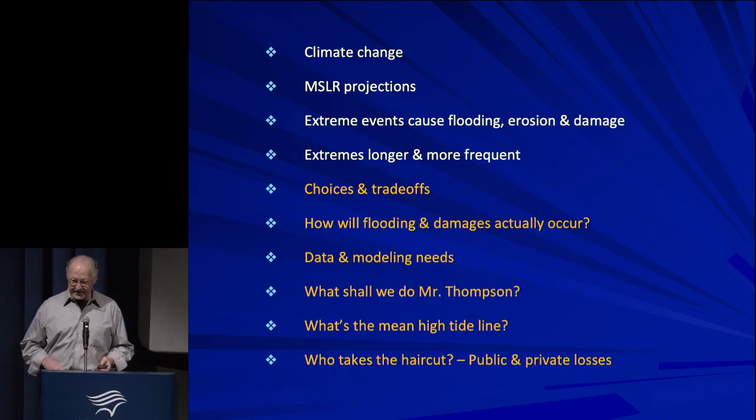Of course, Jerry's been around since the last ice age, and he'll probably be here till the next one. But most of us baby boomers are going to be gone.

And this is the really sad part. I've worked on sea level for over 30 years, and I'm not going to live to see the worst of it toward the end of the century, and that really makes me sad. Anyway, if you're engaged in this the way I am, the worst of it is not going to happen unless something unusual and very frightening happens very quickly in West Antarctica. The worst of this is not going to manifest until mid to late century. So we'll talk a little bit about the probabilities about all of that.

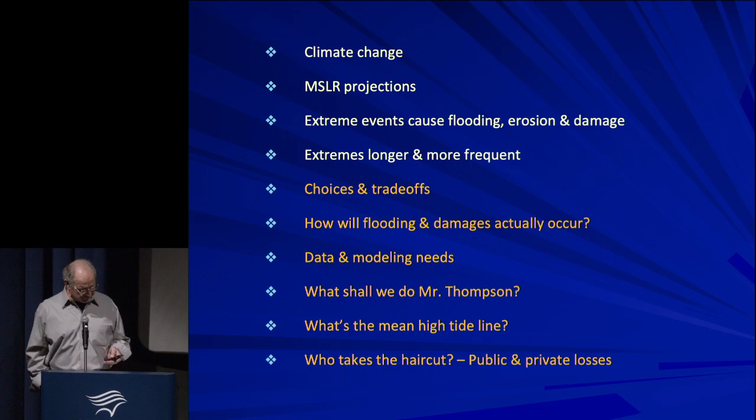By the late 1800s, a guy named Svante Arrhenius, a Nobel Prize-winning chemist, and actually the grandfather of a chemist that worked at Scripps Institution of Oceanography, where I am, talked about the quantitative amount of warming. So 8 degrees, he guessed, if 2 or 3 times the CO2 at the time when CO2 in the atmosphere was 295 parts per million.

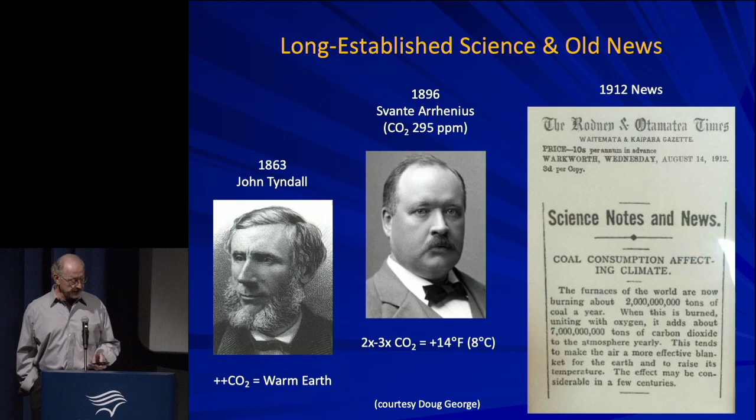So there's a really cool quote from Neil deGrasse Tyson, "Science is true whether you believe it or not." So the bottom line here is, please believe the science. Let's at least start with common facts and common knowledge. All right. So a little bit of perspective here. Walter especially, and most other people get nervous when I start talking about geology, but I will anyway.

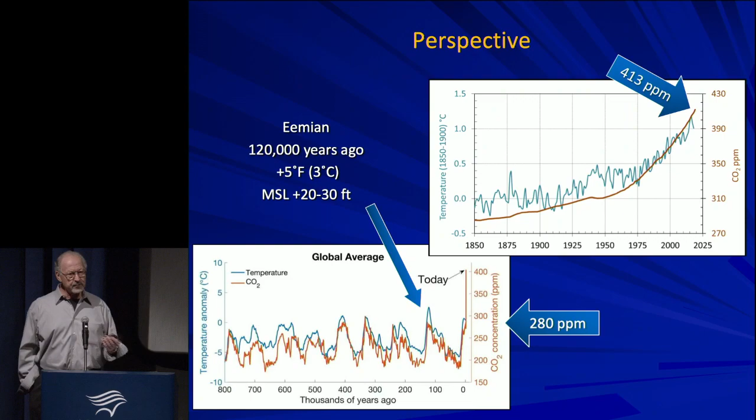The Paris Accords, that we pulled out of recently, they wouldn't work anyway. But if they had, they would try to limit emissions and limit the temperature rise over the next century to 2 degrees centigrade. We are already at 1 degree, so if you look at the upper graph there on the right, you can see from pre-industrial times, we are about 1 degree centigrade warmer, and CO2 concentrations are well on the way to doubling. So we're at 413 parts per million now, well on the way to 560 parts per million, and that's almost unstoppable from what you'll see in a few slides.

So I have these little keynote things that I'll summarize at the end in a couple hours.

We should cut carbon emissions. We should. This is the mitigation part. We should mitigate to try to limit the amount of greenhouse gas emissions and limit the ultimate warming that will occur over the next couple of centuries to where we don't end up with a Venus effect, you know, where it's 700 degrees and the carbon dioxide concentration is 90% in the atmosphere instead of 0.04%.

Okay. So now sea level rise is sharpening and making more acute and challenging the challenges and the trade-offs that we have faced in the California coast and most other coasts, of course, but specific to California, that we faced all along ever since development started in California 150 years ago.

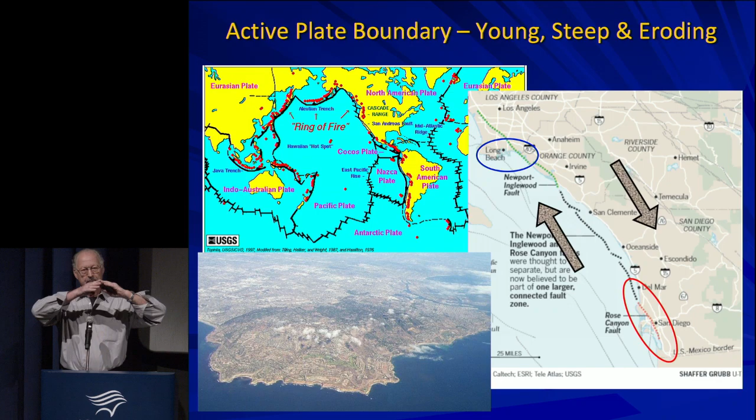And so what happens when you have this northward motion relative to the North America plate, is that pieces of this fault bump together and other pieces separate. When they bump together, something's got to go up, okay? And when they separate, something's going to go down. And so what we see is this alternating, and it extends all the way up the California coast, at least to San Francisco, are these features of alternating highs and lows, river valleys, lagoons, and then headlands.

And so I've got this shot of Palos Verdes there looking south, Long Beach in the right corner there. And so most of our coastline is actually relatively immune, or at least less threatened by sea level rise than many other coasts, right? Think of the Gulf Coast, the East Coast, for example, are much more low-lying, much more subject to severe weather, hurricanes, and all of these things that we don't have. And the reason for that is the tectonics.

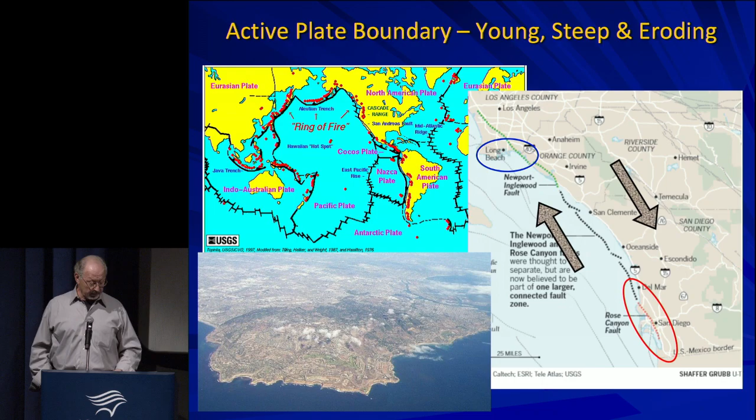So when people tell you that, you know, I had a vacation in California, it was very uplifting, that's actually literally true. Okay, now where are we? I'm getting old, so I have to remind myself where we are.

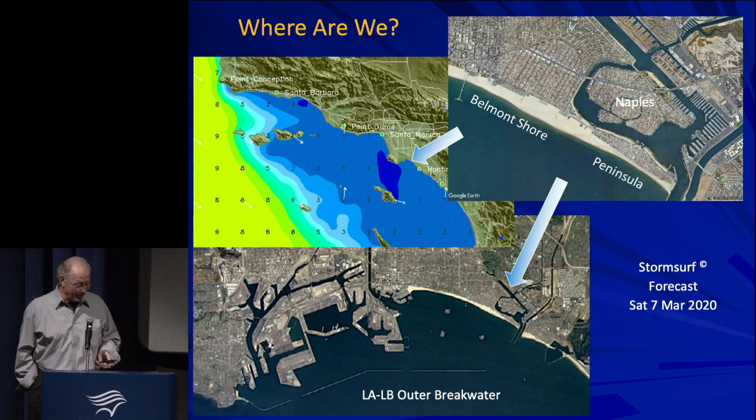We are in Long Beach, and you'll see on the upper right, we're focusing our attention today on Belmont Shore, the Long Beach Peninsula, and Naples, the low-lying, most vulnerable areas that Jerry hinted at. And one of the key features here that makes Belmont Shore and Peninsula and Long Beach in general different than almost all of the rest of the open coast of California is this nice little feature you have here, courtesy of the Corps of Engineers.

Okay, I was promised I could go backwards.

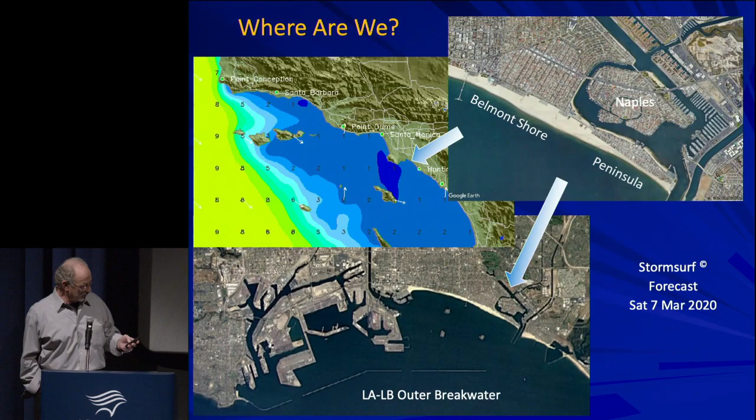There we go. Okay, and that's the LA Long Beach outer breakwater, with its two entrances for shipping. And that's been there, what, since the 40s, maybe 30s? When was it built? 40s. And what it does, in effect, is shelter most of Long Beach except for parts of the tip of the peninsula from the waves from the North Pacific Ocean. And that's a big deal.

So here's a thing you can get on the web on the left there. This is a Stormsurf website, Stormsurf forecast for Saturday. And what you see is interesting. The offshore wave heights are 8 or 9 feet out here in the yellow. But the wave heights inside at Long Beach, just south of the Palos Verdes and toward the harbor area there, are a foot or even less.

And so there's a high sheltering, partly would be anyway just because of Palos Verdes Peninsula, but for almost all directions except from the south, this area is highly sheltered from waves. And that makes it unusual and much more manageable than most of the rest of the open coast of California.

Now there is this window, and it became clear from Hurricane Sergio back in 2018. This is a coastal data information program, a Scripps program funded by the state and the Corps of Engineers, and it shows the Northwest Pacific swell coming in here, and then even higher, you'll see the wave heights over here, what is it, 4.5 feet or so, coming from almost due south, 170 degrees.

Is that better when I talk louder? I can't, I'm too tall.

All right. And that created havoc at least at the southern tip of the peninsula. You'll know better than I do because you were here, many of you, of the problems and the flooding that caused. So there is an opening to the south where the peninsula and Belmont Shore and, of course, Seal Beach and the rest of it are more vulnerable.

And so as the Pacific warms, as more hurricane activity is fueled off the coast of Mexico, and as these things come farther north, this could become an increasing problem in the future. Now, in 1939, before anybody was really talking about sea level rise or warming in a serious way, there was a hurricane that did make landfall in Long Beach, killed a bunch of people, and did a bunch of property damage. So this is not impossible. It's not out of the question that we'll have southern exposure here that's serious.

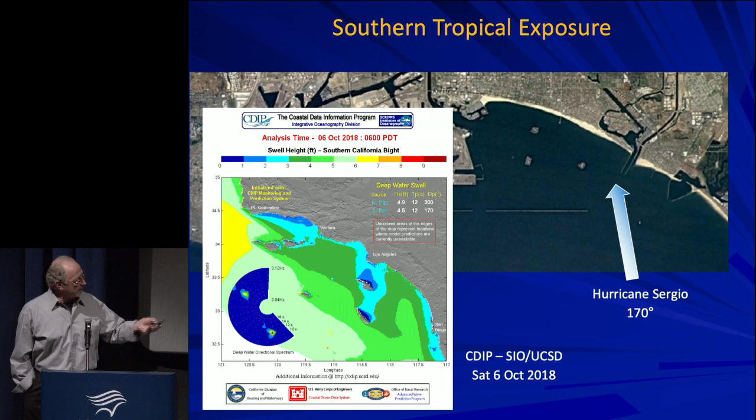So not having much more detailed wave information inside, just out in front of Long Beach, inside the breakwater, is a little disappointing and a little bit surprising. So that's something I would suggest get done.

Okay, now, what kind of future do we want? Well, I love quotes. You'll see that in the next few slides also. So this was Greta Thunberg, from Sweden. I want you to panic. I want you to act as if the house is on fire, because it is. And she's talking about the warming in general.

So the reason I frame it this way on the right is because of the latest guidance, I put guidance in quotes, from the California Coastal Commission and the Ocean Protection Council. And guidance in this sense means you damn well better take this into account if you want a permit. That's what guidance means in state jargon. There are 2 possible futures considered in what I'll talk about shortly.

There's a high emissions, and those of you that follow the IPCC, it's the so-called 8.5 radiative, what's it called, representative concentration pathway or something. Anyway, it's the number of watts per square meter excess radiation that will occur by 2100 if we go in the high emission scenario.

So it'll be 8.5 watts per square meter global average of excess radiation to warm us, keep us toasty. And that's the trajectory we're on now. So you see now is 2020. And then there's a low emissions scenario, so they just break it up into 2 rather than the more complex 4 or 5 more in between.

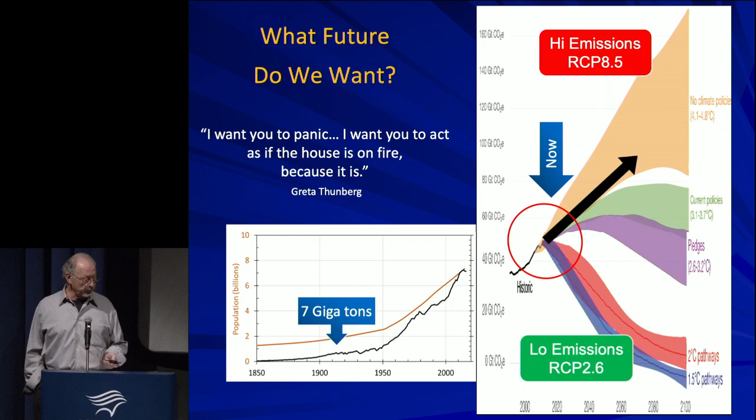So the question is, what future do we want? And that's really the largest uncertainty. We're going to have some discussion about uncertainty. The biggest uncertainty is what humans are going to do about emissions. That's the biggest uncertainty. It's not the science as such.

Now, if we have a doubling of CO2, we don't know exactly if that's going to be 2 degrees or 2.5 or 3. That's true. So the science is uncertain in that regard. But the biggest uncertainty of all is nobody knows what humans will do in the next decades or century to limit the effects.

All right, so this is Jim Hansen 32 years ago, one of the leading climate scientists in the world. Ironically, he started his scientific career studying Venus. And this got him interested in CO2. And he was one of the early ones who said, look, if we keep this up, we're going to have a runaway Venus effect on Earth. And instead of an average temperature of 60 degrees, it'll be 600. That's far-fetched. That's not likely in the next few hundred years or even few thousand. But that's probably how Venus got started as well.

Anyway, we need a steadily increasing carbon fee. So that was his method, and still may be the most economically rational way to do it. Just price carbon to pay all the externalities, and then let the markets sort out what's the most efficient way to cut carbon use.

And then you have the second. So this is mitigate, adapt, retreat, right? The 3 approaches. So you reduce the amount of carbon, and then you have the Winston Churchill approach. We'll fight on the beaches and we shall never surrender. So that's the adapt approach, which we're bound to do a lot of because mitigation just isn't moving forward fast enough.

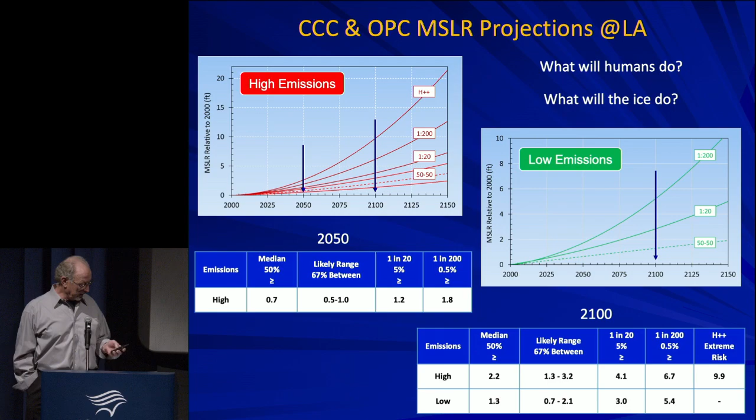Only 20 feet. Who has a two-story house on the peninsula? That's about 20 feet, right? If all of Antarctica melts, which nobody expects, that's like 270 feet of sea level rise globally, including here. So just to put that into perspective, nobody expects that to happen. I just say that to get your attention.

So that high scenario graph is repeated here, with the 2000 to 2050 graph inset, along with the measurements of sea level. Those are the annual mean sea level measured at the LA tide gauge, which is down there close to Palos Verdes.

It's in Cabrillo. What's the San Pedro. That's what I was trying to think of.

It's near San Pedro, so it may be in an uplifting situation from Palos Verdes, because the sea level rise at LA over the long term, over the last 100 years, is lower than in most of Southern California. So you have a little bit of an advantage, but that might just be because the gauge is in a funny place. This is a study we've got to do to figure out if this is representative of this southern part of the bay near Long Beach. But anyway, there's the projections and the inset.

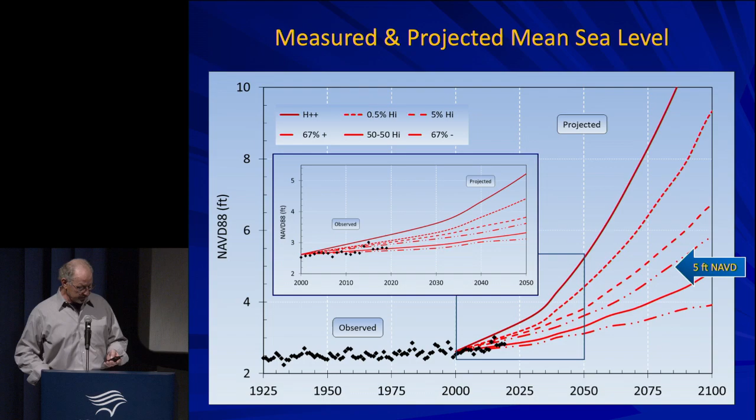We can talk about this later if we need to. So mean sea level doesn't actually flood anything, though, right? It's when you have high tides and El Niños and big storms and storm surges and big waves. That's what actually floods things.

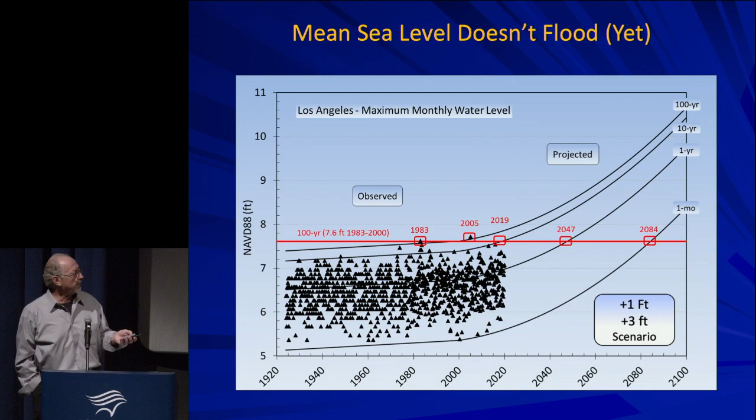So just remember 8 feet, I said keep that in mind. There's a cross-section at 64th Place, not shown on the map here. 64th Place is down here, about halfway down the peninsula. This is the berm built up seasonally on the peninsula to protect from wave attack and storm surge. You'll see the peninsula on the ocean side is 10 or 11 feet, but on the bay side, you quickly get down below 8 feet. So 8 feet NAVD for the peninsula, for Alamitos Bay, is a crucial elevation to keep in mind.

And the maximum water levels already observed, without even the next 50 or 100 years of sea level rise, are already very close to that elevation.

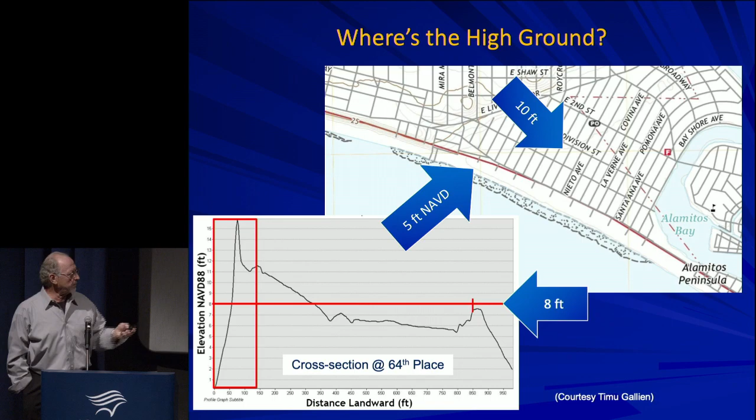Now, I showed this picture. It's the same picture, same monthly maxima, but I covered over the dates here, because as Alyssa said, we don't know when these elevations are going to occur. There's a huge range of uncertainty, as we saw in the graphs and explained, and anybody that tells you we know what sea level is going to do, except probably go up, almost certainly go up in the future, how much is just unknown at this point for the reasons I said.

The point is I think it's more useful in many ways to think not so much about when, but how much. So mean higher high water, the average of the high waters, is down here at 5-something feet, 5.3 feet. I love how NOAA puts these. HAT is the highest astronomical tide at LA, about 7.1, a little over 7.1 feet. Right, so that's over here. The highest observed water level, HOWL, is the 7.7 that I pointed out earlier. It was during the El Niño of 2005.

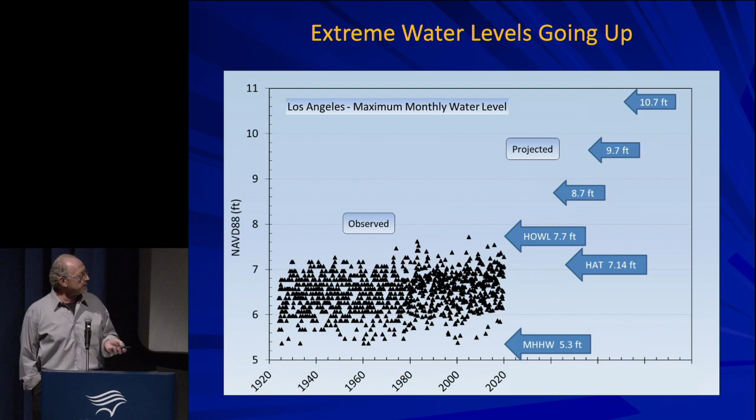Now think about what this means if you have 1 foot or 2 feet or 3 feet more of sea level to your particular situation. That's what we're trying to get at today in this meeting, and I'm sure Jerry has future meetings to the next ice age planned out ahead, okay. All right, just to get you ready.

Now, Jerry hinted at this. How will losses actually manifest and unfold? I am pretty certain, as a coastal oceanographer, Walter and I had a job in Biloxi. I visited this area, Gulfport in Biloxi. I actually saw this sign, the Waffle House sign. If it wasn't so tragic and loss of life and property, it would have been funny. Just having the sign and a slab, where the Waffle House was, I don't know if you've been to a Waffle House, but they have really nice breakfasts there, or they had.

On the coast of California, the future is not going to manifest this way, almost certainly. And Katrina, there were some Hurricane Sandy pictures there on the left.

First of all, we don't have 80, 100 mile an hour, 140 mile an hour winds. We don't have, we really, literally, physically cannot have 23-foot, 28-foot storm surges like they had in Biloxi that essentially wiped out entire neighborhoods. There was flooding, but it was this massive destruction of entire towns, coastal towns stripped away. I drove inland, a mile or a mile and a half inland. There was a huge fishing boat about 100 feet long sitting in somebody's front yard, by this time, a few months later, high and dry. That just can't happen on our coast.

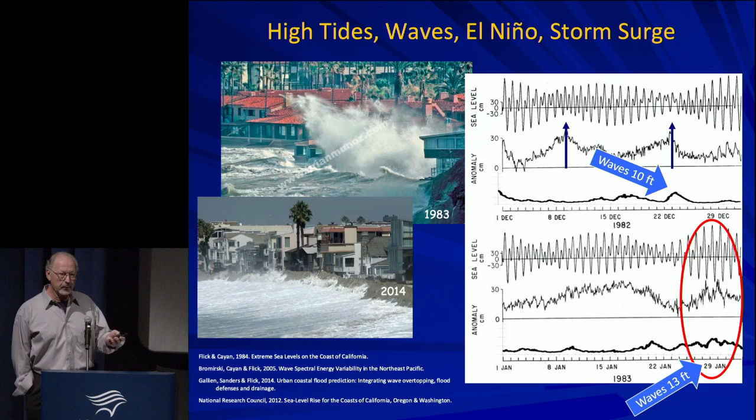In the 2015-16 El Niño, we had a near miss, again, because the tides were not in the right phase. Otherwise, the destruction would have been a lot worse. So you can predict the tides.

These are the maximum monthly tides predicted for the next 50 years, out to 2050, 30 years now, and you'll see these patterns in here. So there's these 4.4-year patterns, higher, then in between. And if your eye is careful, you'll see this 18.6 year pattern, and this has to do with the astronomy, lunar motions, the astronomy of the moon.

2014-15, which was all hyped with king tides and the El Niño and all that stuff, those were actually the lowest tides in 2.5 years. See, 2.5 years earlier, 2 years later, those tides were quite a bit higher. And half a foot makes a difference. It doesn't sound like much, but it does. A half a foot can make a difference between flooding over a seawall or not.

And the coincidence of the day, the time of day of the high tide and the approaching waves and the storm surge and all that makes a huge difference. So this is very important.

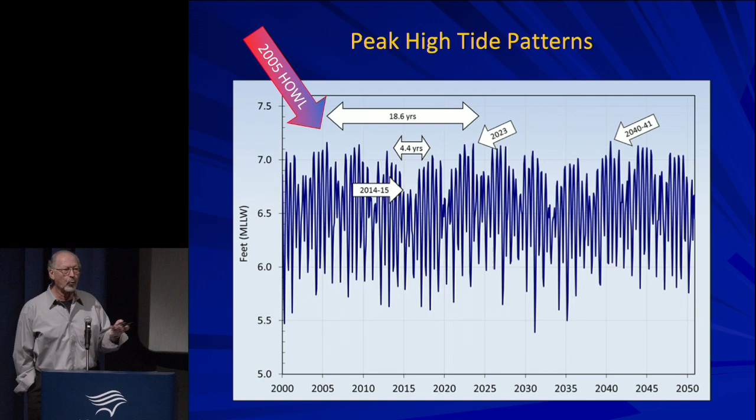And there's your 2005 highest. There's the HOWL. So the highest observed water level occurred during one of these 4.4 year peak cycles, which is not surprising. So now you can almost circle, over the next few decades, the years where you're most likely to have floods. Not certain, but most likely, or more likely, just because of the tide patterns.

Okay, so Walter and I have done this for... where was it? Up here in Northern California, San Luis Obispo, for what was the name of that place? Yeah, for Unocal, but the location, what was it? Avalon. No, not Avalon, Avila Beach.

So we would look at the forecasts, we would look at the tides, we would look at the wave forecasts, and we would make some pronouncements. I would get my briefcase, I'd be from out of town, and we would meet, and send out flood warnings: okay, next week we have high tides, storm waves, so-and-so, and the model shows that you're vulnerable at Avila Beach for those reasons. That could be started anywhere along the coast. A lot of that information is available, and that's a recommendation.

Okay, so Alamitos Bay, what was I going to say here? Oh yeah, so this is how it actually will, in my opinion at least, manifest, how the future mean sea level rise will manifest. And it'll be flooding, mostly flooding, especially here where you're largely protected, not totally, but largely protected from waves. And so the progression will be, there may be other, more nuanced steps in here, but from nuisance, which it is already occasionally, to dangerous and to catastrophic.

And I think the big question, one of the big questions that we have to address and want to address perhaps today, is to start the conversation about what happens after the catastrophic flood, what happens the day after. Your house gets flooded, or the aquarium gets flooded, or some public facility.

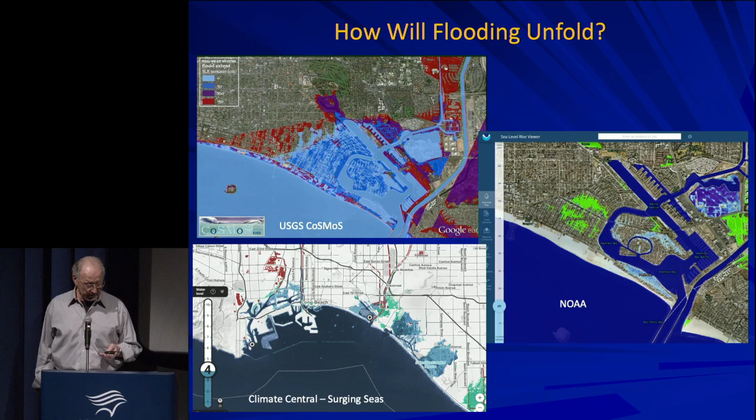We look at these models. There's the USGS CoSMoS model, Climate Central has a model, everybody and their brother-in-law, including NOAA, has a flood model. Most of these flood models overestimate the flooding. So first of all, you should be looking at models, or developing models, that actually work for current conditions, so you can make a better estimate of what future conditions with sea level rise will actually be.

So this is a thesis result from University of California, Irvine, from Timu Gallien, who developed a flood model for Newport. And for identical water levels, 7.3 feet NAVD, this was I think the NOAA flood model, or one of those models. There's Balboa Island, completely underwater. And here are her measurements and her model. And you can see that the flooding is much less severe.

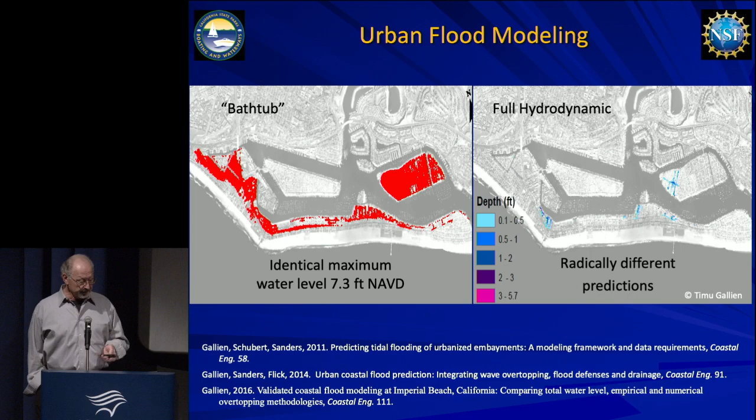First of all, the high tide only lasts a few hours. Many of these places aren't connected, right? Even though the elevation might be below 7.3, there's no way for water to get there. So all of those affect drainage, seawalls, just 100 small things actually matter a lot. So this is something that really needs to be done properly for Long Beach. So that's another recommendation, and I'm getting close.

So who shares the losses? I have a few things. This is more of an editorial comment. These are my own private opinions. Public and private losses, well, that's not an opinion, that will happen. Public and private losses will occur. This is my personal opinion, for those of you listening that have power over my day job.

I think there's a public responsibility and an interest in private property. First of all, none of these houses were built illegally. Right? You all have permits for your house and your development. Secondly, you've been paying property taxes. Some of you have probably been paying pretty hefty property taxes on your coastal property. So there's a public benefit and a public responsibility.

Now, a lot of people say, well, these people shouldn't have built this stuff there in the first place. You should have known better than to build a house in a low-lying area. Well, but some public agency gave you a permit to do that. Maybe the Coastal Commission even did, and your city or your county. So there's some public responsibility here, for sure, and there's certainly financial interest because of the taxes.

There's also, I think, a public interest because when the day comes when you can't rebuild your house, that location will probably return to the public. So there's some public interest there for the long-term future. So I think that all comes down to the legal and the financial alternatives. And that discussion should start now for what will certainly happen over the next decades and centuries.

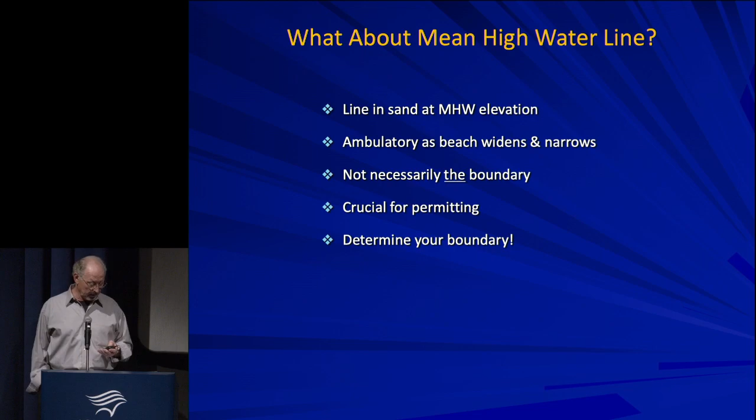Boundaries can be fixed and not ambulatory for various reasons that are complicated. I'm not a lawyer. You should find a lawyer that can talk about that, and then a competent surveyor to tell you where your actual boundary is. And that's really all I can say about that.

So this summarizes, this is another one of my favorite quotes. What shall we do, Mr. Thompson? What shall we do? Just a couple of minutes before they blew Dr. Narcisse's head off in Boardwalk Empire. Great show, recommended. We went through all of this. I've used it more in my time than I should. We're going to need a bigger boat, so thank you.

Thank you, Ron. So I went way over my time. That's all right.

So my takeaways, a few of them. Flooding will go from nuisance flooding to dangerous to catastrophic. The problem is we don't know when that's going to occur. I think it's unlikely that it will occur, though, before 2050. But as you say, it will happen. And it's surprising how little we're doing to get ready, because the longer we delay, the less time we have

to adapt. We need to have a wave study. We should develop the kind of model that Timu Gallian has done. She has spoken here about that. And my hope is that we can raise the level of awareness in this city so that we can begin to plan appropriately to deal with this issue.

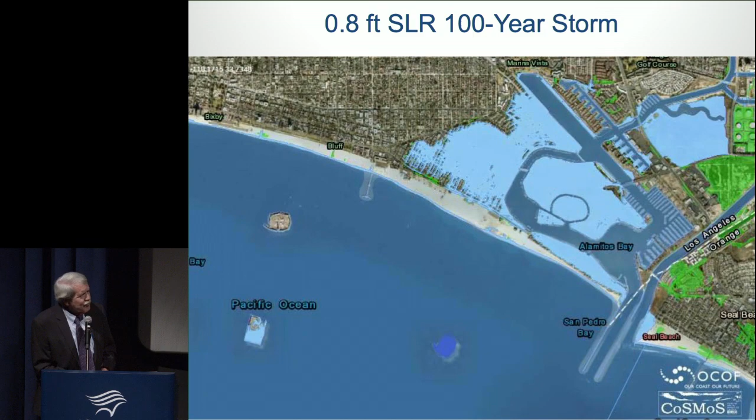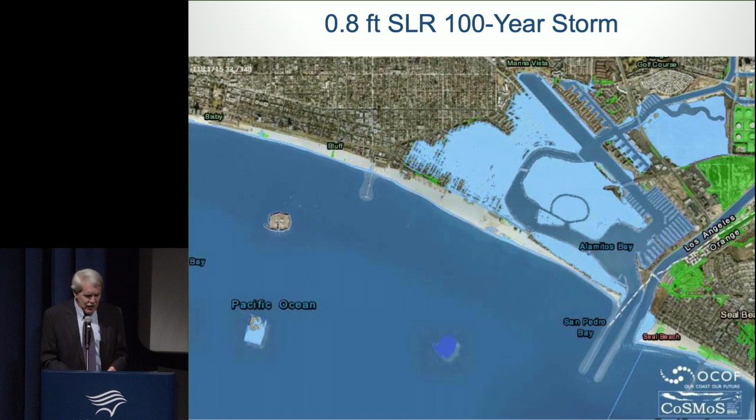If you switch to just 0.8 feet of sea level rise, and Ron showed this photo as well, this covers a very large area, flooding most of, we'll say, both Naples, the Peninsula, and this entire area. The important thing is that this creates a severe problem. Ron talked about when you might expect this.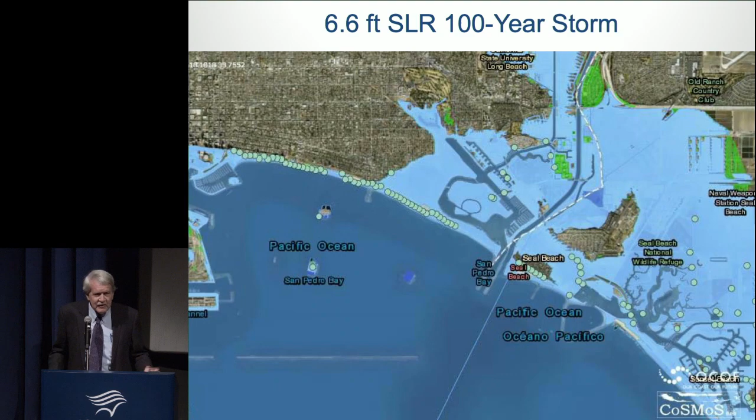At this point, you might be asking yourself, why do we have all of these problems? Well, as it turns out, this whole area has been built within the floodplain of the San Gabriel River. All of that green margin was the low-lying floodplains of the San Gabriel River, in which we've all urbanized and built the development, albeit at a relatively low elevation, but your urban environment has been built in the San Gabriel floodplain.

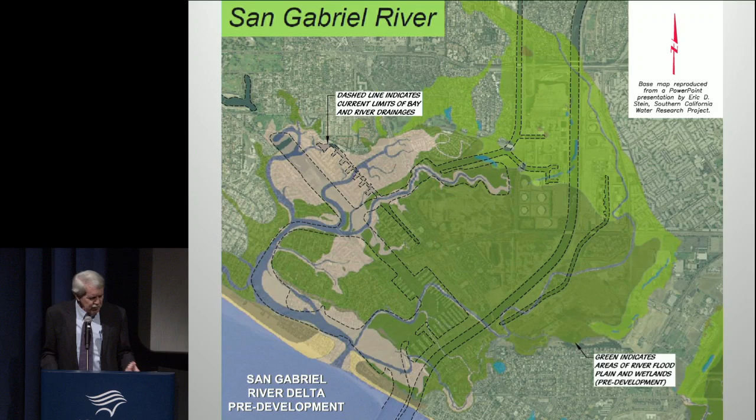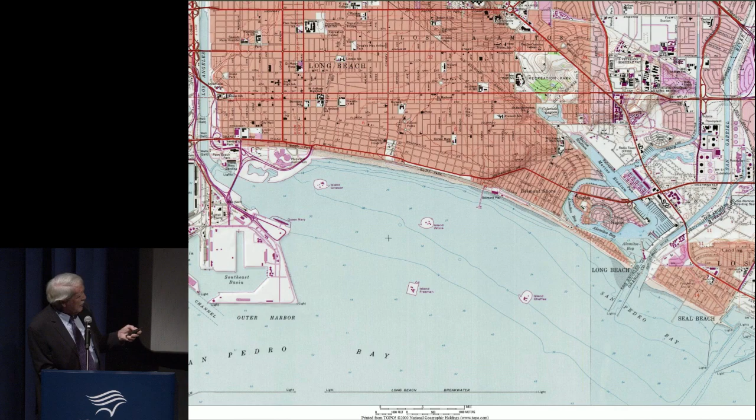Now, this is a USGS map showing your area, and again, the important thing is you can see, I can hardly see from here, but even the topo maps show, am I pointing at the right location? Shows an erosion hotspot at the east end of the Long Beach breakwater. And this breakwater is super important for the city of Long Beach. You are so much better off than most coastal cities where you have the full brunt of coastal storms. The Long Beach breakwater provides significant protection for the majority of Long Beach.

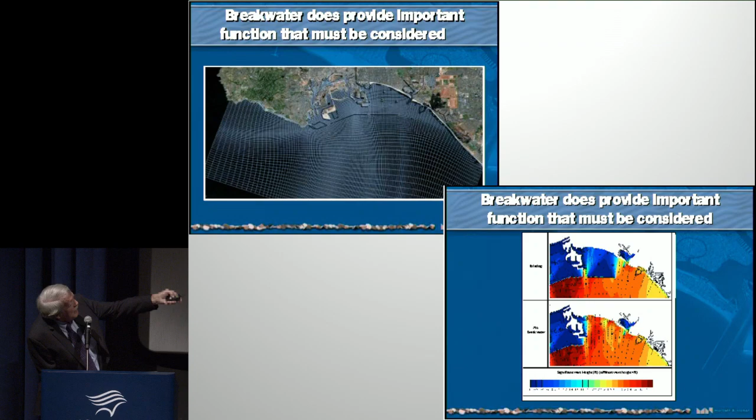Now, this is a photograph, both the study area and some wave modeling done by Moffatt and Nichol in response to a study requested by a very small but vocal group of folks that want to see at least a partial, if not total removal of the Long Beach breakwater, because they want to bring surfing back to Long Beach. As you can see over here, the consequences of removing even half of the breakwater will have a devastating effect on the city of Long Beach, your coastal area.

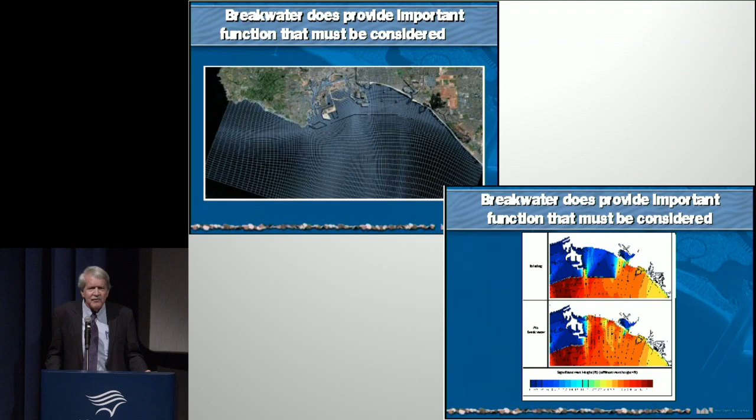And what I would request, the one thing, if you take one thing away from this entire lecture series today, don't ever, ever let anyone talk the city of Long Beach into removing this breakwater. You don't realize the value it provides. Keep in mind, 95% of world commerce is transported by ships. You have a very good harbor here where ships come in and anchor in anticipation of getting into both the Port of LA and Port of Long Beach, and it provides a safe harbor for the ships, but it provides significant protection for the city of Long Beach.

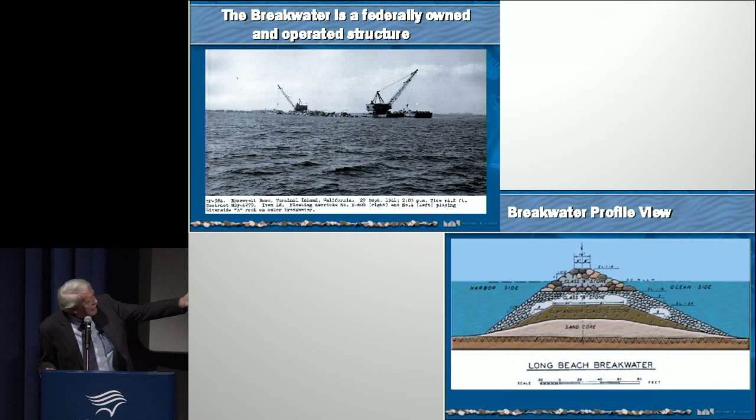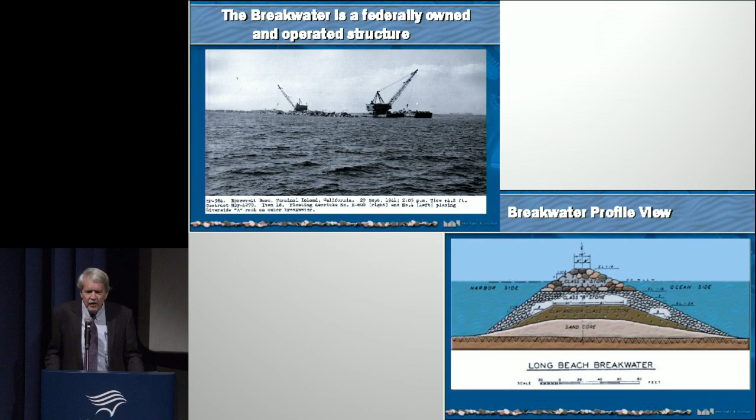Again, this shows the breakwater under construction in 1941, shows the actual design section of the breakwater. The top of the breakwater is about elevation 20. And actually, one of the things that you can do, unlike virtually every other coastal city, if you extended your breakwater easterly 1,500 to 2,000 feet, not only would you provide a little bit more safe harbor for ships, you would completely protect the city of Long Beach from offshore storms. Just something to think about.

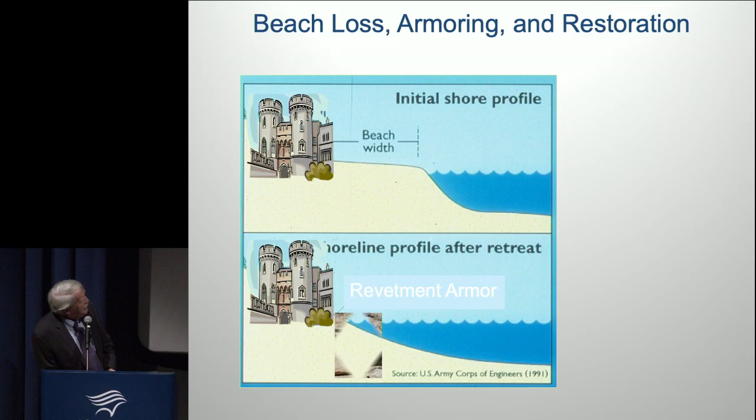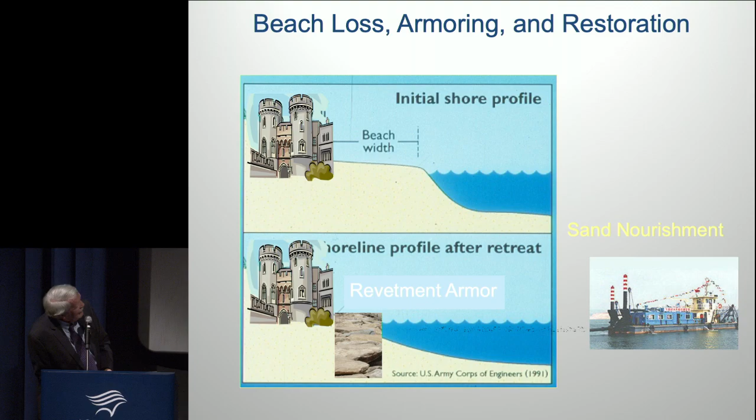What we do as a first line of defense is, as engineers, whether you build a seawall or a rock revetment to stabilize, but what we found is the Coastal Commission doesn't like rock revetments. What they do like is beach nourishment, and the beach nourishment then provides protection for the rock revetment.

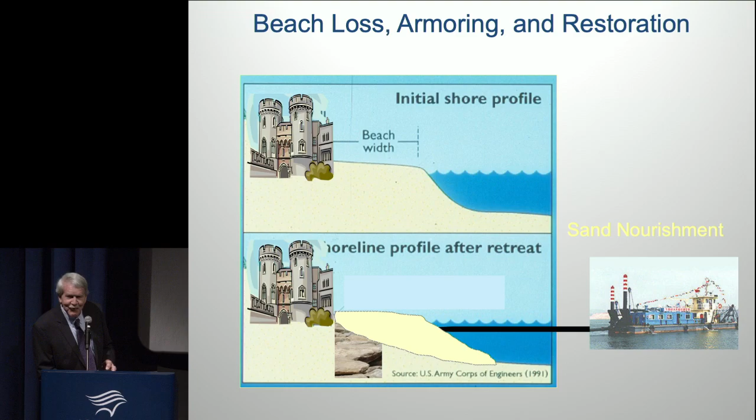And Ron gets credit for this slide. This is Ron's slides, but I thank you, Ron. He wants credit for that.

So this is a slide actually in New Jersey, but the thing is, beach nourishment is something that while you guys move sand very economically, you need to occasionally do beach nourishment. This is Great Lakes Dredging, one of the largest dredging companies around. They did the San Diego County dredging projects in 2001, 2012. This is off of Townsend Inlet, but it's really economic, putting aside the mobilization cost of about $5 million, a lot of money.

Because you're within the outer harbor, it's very easy to dredge an abundant amount of sand to put it on the beach. And you could pretty economically put sand on your beach when one of their large dredges is on the west coast to provide additional stabilization.

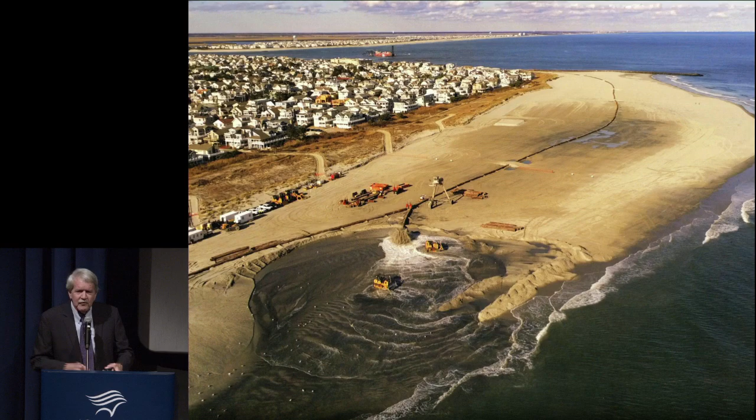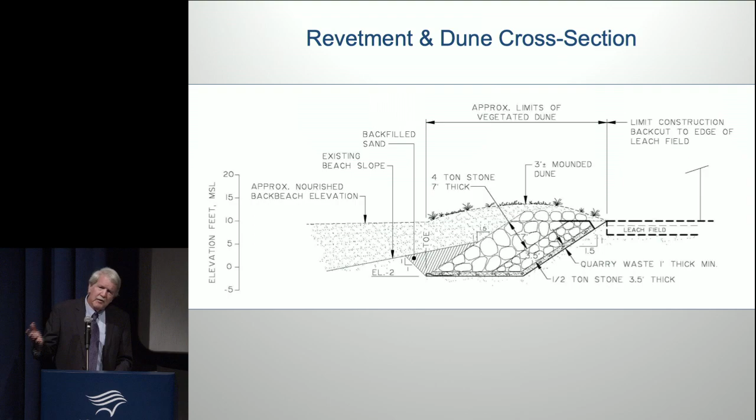This is a photograph at Broad Beach where they have dunes, and this is where we've done a fair amount of work, but what we've done is we've recommended a rock revetment to stabilize and protect the property with a stabilized dune, and the stabilized dune provides an attractive environment that the Coastal Commission approves of. So this is still a permittable project, and every time a big storm comes and erodes away the dune and exposes the rock, you just simply come back, re-nourish and recover the rock and revegetate the dune.

But this is dealing with the storm surge that Ron talked about. On the East Coast, you have these very, very large storm surges associated with hurricanes. Fortunately, our geology, or our offshore environment, is very different. You won't have this on the West Coast. But it illustrates what we're doing in the United States today. On the East Coast, they have very large dune fields, often stabilized by rock revetment to accommodate that very large storm. At this point, because eventually you'll have to raise grades to protect against coastal storms, and again, if you extend your jetty 2,000 feet to the south or to the east, you'll substantially delay that period of time.

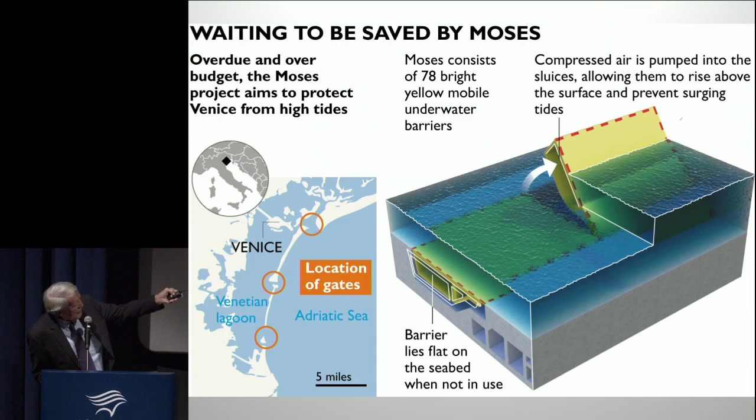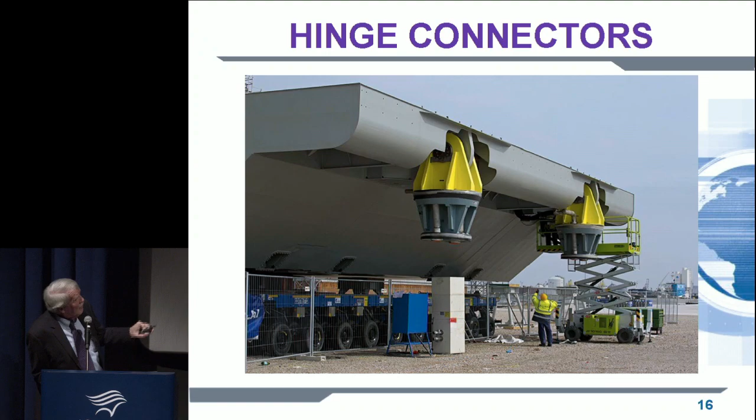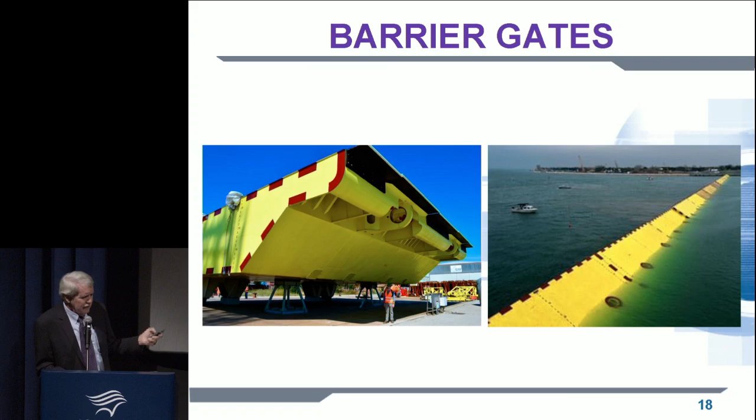The problem, though, and again, apologies to any Italians in the group, is that through graft and corruption, the Italian mafia siphoning hundreds of millions of dollars off, they've run out of funds and they've not been able to completely stabilize, and they're having problems maintaining their facilities, and they're still having flooding. Just another photo of the difference here.

And again, compare this with the Dutch. This is an inconvenience, a serious inconvenience that affects tourism, it affects the integrity of the buildings, but these people are not dying. If a similar thing happened in the Netherlands, where sea level is 8 or 9 or 10 feet below, if you breach one of the sea dikes, thousands of people would die and it would destroy the Dutch economy.

So I just wanted to close with a couple photographs. This is again from Holland, and I want to remind you that raising grades is not that difficult.

If you really think about it, in the Netherlands they're building what they call polders, where they're actually demolishing both urban and rural areas, raising grades to rebuild structures. This is a very large farming area where they demolished 18 farms, raised grades 20 feet, and rebuilt those farms, with all the cows in the low-lying areas.

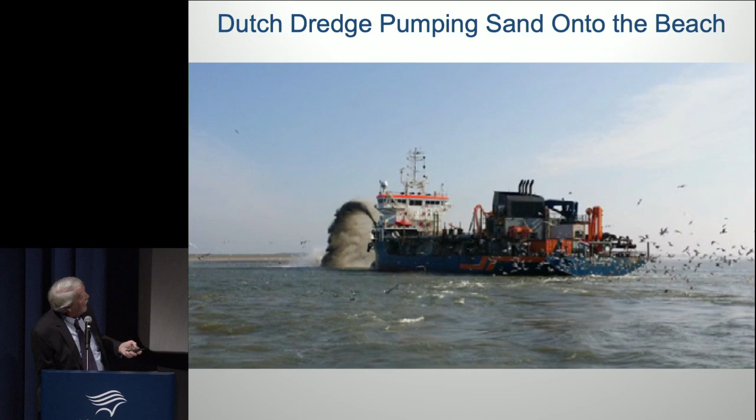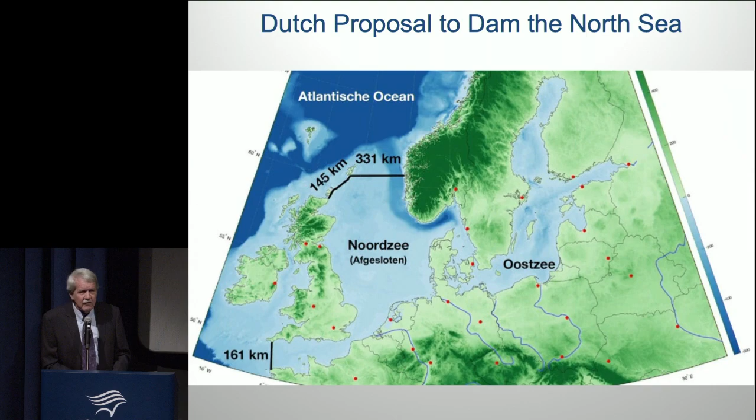I wanted to close with the Dutch's current vision for stabilizing the entirety of the North Sea. They want to completely dike in the North Sea at a cost of $500 billion. That's a lot of money. Surprisingly, England, Ireland, there's a lot of folks getting flooded with serious problems. At $500 billion spread over 20 years amongst the 14 countries adjacent to the North Sea, it amounts to 0.1% of the collective countries' GDP.

Thank you very much.

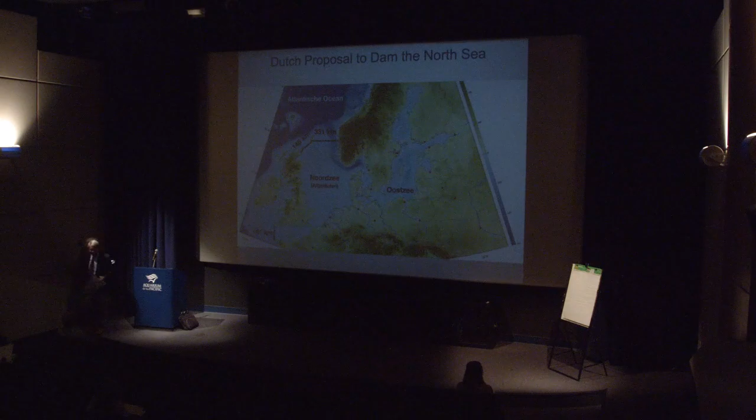Thank you, Walt. So I think the European experience shows there are a lot of things you can do with engineering. The costs are high, but the savings also are enormous, plus what you do in terms of diminishing social disruption. It also shows, I think, you have to take the long view, which is something we're not very good at in the United States.

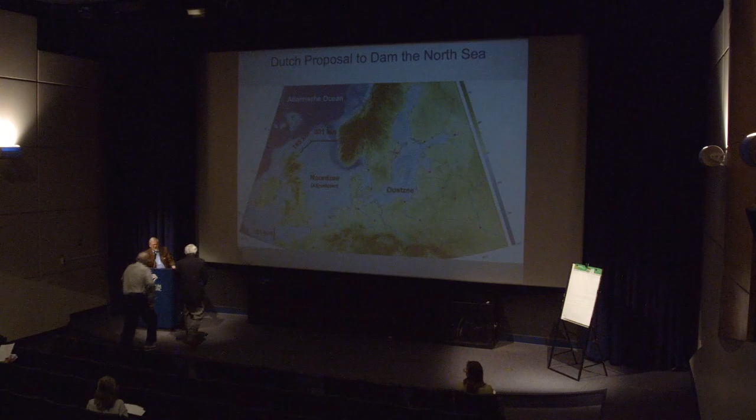If you look at Long Beach, what would be your 10-point program? And you say you have to know what you want, so I'm going to tell you this is a personal perspective. Given that sea level rise affiliated with the RCP, the Representative Concentration Pathway for 8.5, because I think that's likely to continue on, and if the goal is to keep people in their homes and businesses for as long as is practical, what would we do? Now clearly, by the end of the century, if we get to sea level rise of 20 feet or so, it changes the game. But we've got a number of decades, and this idea that the Coastal Commission has with a 6.6 foot rise of sea level and a 100-year storm - that's clearly a black swan event, low probability, high impact. I want you to give us the gray swan impact. What would you do? What are the 10 things that you would recommend?

I would say from an engineering perspective, the first thing is to encourage Congress to extend your LA breakwater another 2,000 feet to the east. What that does is completely eliminate storm waves from the city. It also eliminates the need for the city to do all this grooming every year. But at the same time, you still need to add more sand. Eventually you need to add dunes, and I would propose you could probably install the dunes even without the rock, with the jetty. So those are all good things, but to protect the inland areas - Naples, Belmont Shore - you need to eventually slow down the opportunity for water to flow into the inner harbor, and that, in my mind, requires a gate.

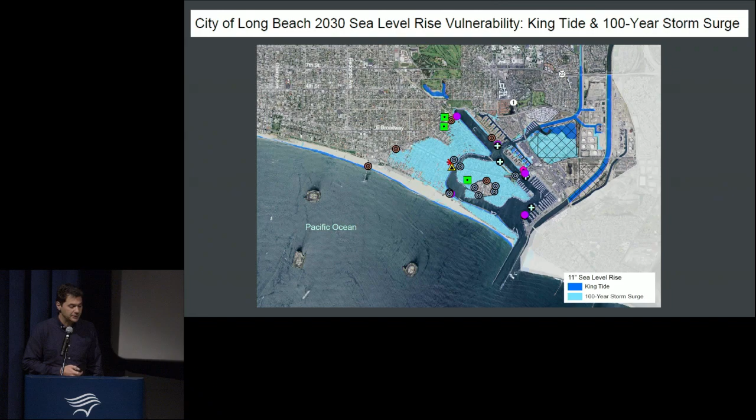You know, what is the scenario? When is it going to happen? What is included and what not? And even when you do a good job of doing that—about a month ago I found this gem online. It was a study from two professors from Georgia State University.

They interviewed over 1,000 homeowners in Florida, and showed flood maps to some of them but not others. Surprisingly, those who had viewed the maps were, on average, less likely to say they believed climate change was taking place than those who had not seen the maps. And regardless of political affiliation, the majority of homeowners denied there was a risk to their property values.

So I was kind of shocked. Over the last couple of months, I'm going to talk about a couple other projects we're working on with these tools. I had a chance to talk to folks who are not engaged with sea level rise or don't know much about climate change. How do you communicate some of these concerns to them?

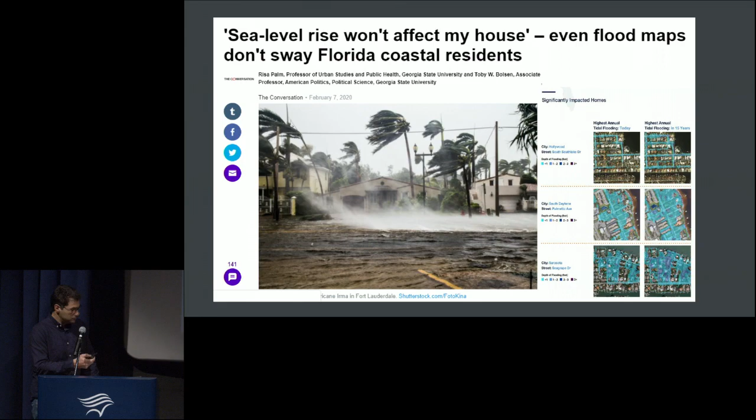For the last couple of years I've been researching virtual reality and why we decided to pursue this as a method of communication. There's emerging research showing that VR promotes pro-social behavior change and preparation for natural disasters.

We're collaborating with a team, but before I get to that, there was a study done by two Dutch scientists in 2013 showing that people who experienced flooding in a 3D environment declared a higher intent to evacuate from flood-prone areas, and also to purchase flood insurance. This wasn't VR or fully immersive, it was just a 2D computer screen with a 3D, video-game-like environment you could navigate through.

So we're working with a team at Stanford. They have a virtual human interactions lab. We're developing a social study to see how the use of virtual reality might change people's intents and perceptions related to this issue. We're also adding the question of when people would eventually declare an intent to relocate from the coast or not, based on how they see these issues and deal with the uncertainties.

So the first project I'll talk about is in Santa Cruz. We started there, and this problem isn't just here in Long Beach. This is West Cliff Drive, and the city is working on two projects at the moment. One was funded by Caltrans to look at transportation impacts on West Cliff Drive due to sea level rise, and another study funded by the Coastal Commission to look at coastal access to the beaches there.

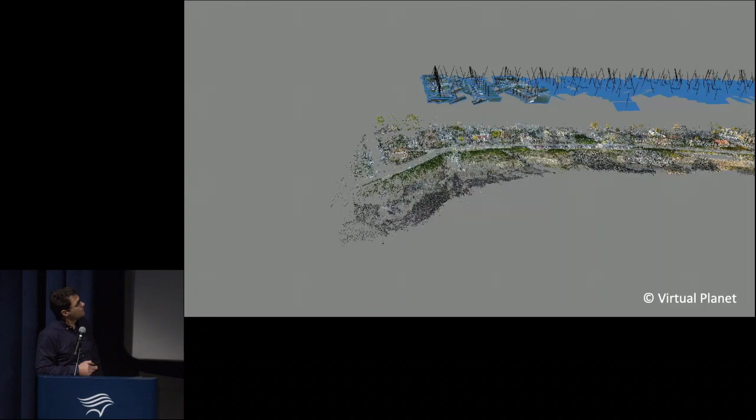All right, so this is the drone flying. You can see the point cloud made denser, turned into a 3D model, then texturized so we can recognize it. These were one of the first generation projects we did for the models. The models we're developing for Long Beach are much crisper. Once we get those 3D models in place, we load them into this virtual reality room.

So it's a kind of a place that you're immersed, and then you see these models. And over here, you can see a projection. This is Cowell Beach, a famous surf spot in Santa Cruz. The boardwalk is just to the right. And here you can see a projection of 2.4 feet of sea level rise combined with a 100-year storm in the city as well. So one of the things that we find is that when you recognize the building, you recognize some of the places, it really changes the way you perceive some of that information, right?

And the folks that we're working with at Stanford, they're doing some research, and they've shown that in virtual reality, you can interact with the environment. You can pick things up, you can walk around, you can move, you can look around. And they found that the folks that move the most inside those virtual environments, they also retain more knowledge. So when we see maps, when we hear words, and we read things, there are parts of your brain that get activated.

But when you're fully immersed in an environment like this, the parts of your brain that light up are the same parts that light up when you're actually seeing the same things. So they did functional MRI, and they found that it imparts a whole different reaction, emotional response, and physiological even in a sense.

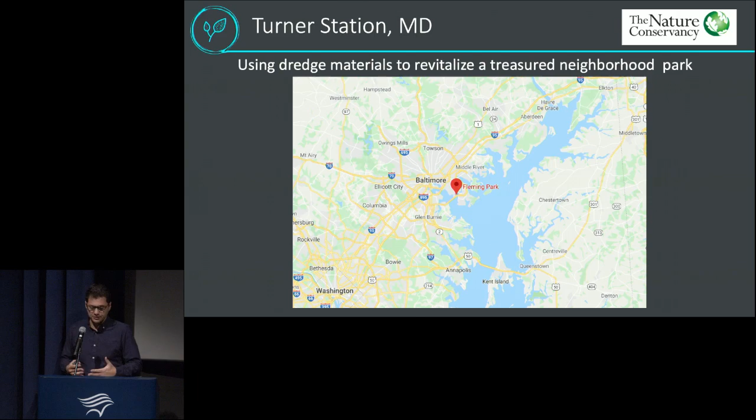I just want to briefly talk about another work that we did in Maryland. So this is on the Chesapeake Bay, a community called Turner Station. And it's a traditional low-income African-American community. And they're dealing with issues there with sea level rise as well and some projected flooding. So we met some of the residents that grew up in this region playing baseball in those fields. And the kids can't play there anymore because it's always wet. You can walk there, but I was there flying the drones and my pants got wet. During high tide, it's really bad.

So we did this work, and the idea there is that the Baltimore harbor is dredging some of the channels because they want the largest ships that they built now. They want like 2 of those to get into the harbor side by side into the channels. So they're going to have a lot of dredge materials available, and they want to provide that as a solution. So the plan here, and I'll play the 2 animations, is to bring that dredge material around this park, raise it, put some soil on top of it, and come up with kind of a living shoreline solution. And one of the things that I liked also about these VR projects is that it starts unexpected conversations.

So when I did this, we used NOAA's sea level rise projections. And if you look to the right, there's a neighborhood there. That was not in the scope of our project. But when we designed the 2D specifications and we sent it to the artist to do the rendering of the flooding, I forgot to tell him that's not part of it. And then when this came back, I put the goggles on for the first time, and I knew all about this area in the project based on the research. And still, it was like getting punched in the gut. I was like, oh my God, what are we going to do about that? We're not talking about that side of it.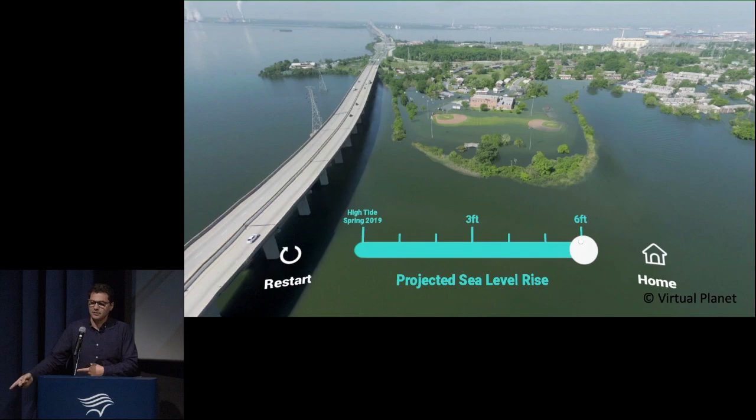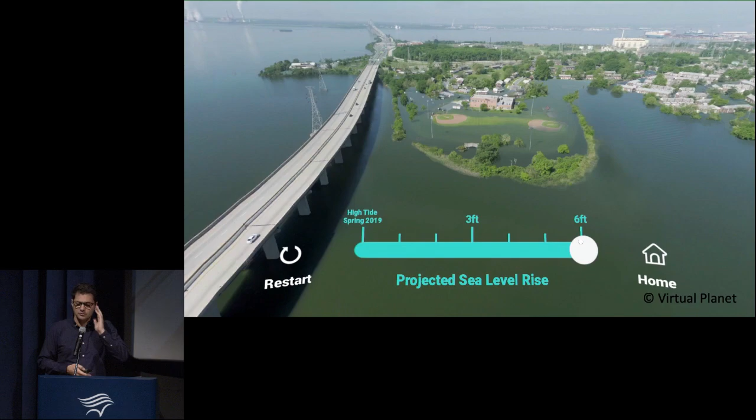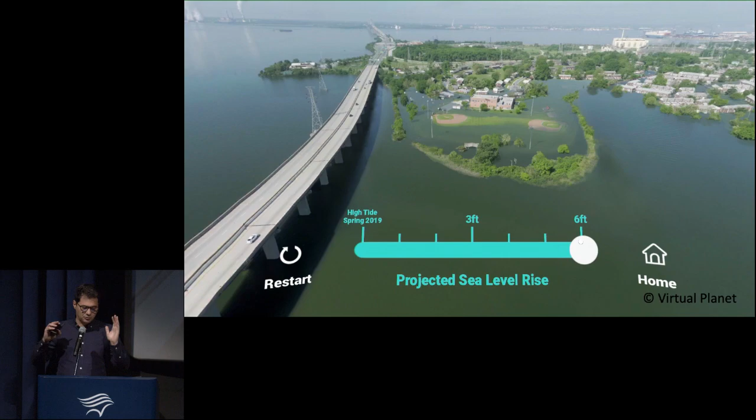And because of that, we had a long discussion: should we keep it? Should we take it out? How are people going to react? And there's an NPR story that came out that's really great. It was on Morning Edition, if you want to look it up. There are some reactions of the residents that are quite strong when they saw some of the things they were looking at. But we talked to them, and now there's great interest in addressing the issues in the neighborhood as well, which is great.

And then we are here, Long Beach. So as Jerry very well put, what could be done so residents and business can stay where they are for as long as possible? So I got the cartoon from one of our previous meetings. We had an artist kind of documenting the discussion. I thought it was great, so I have some of that here.

But before we get to the cartoon part, this is one of the aerial views that we did for Long Beach. In here you can see the sea level projections from 0.8 feet of sea level rise onwards. But one of the things that we learned when we saw this, and I'll play this again, you can't really tell this by looking at a 2D map, is this idea: if you look at the water, it floods from the bay, as Ron just mentioned. So even with 0.8 feet of sea level rise, there's some areas in the back that get significant flood.

And then we just overlaid with a 100-year storm just to see how similar it is, and then with 4.9 feet, the whole area. But that's far in the future too. It's just to kind of show what's coming. But it was great to see the peninsula side kind of showing up first.

So this is one of the 3D models that we have in the virtual reality tool for Long Beach. We have 4 of them covering the entire peninsula. And here again, you can see the water coming in from the inside, from the bay side. One of the great things about the virtual reality is that the headsets that we use are very cheap. They're about $150 now, but they don't handle a big model. So we can't put all 4 models together there. We have to do one by one, but you can see them here.

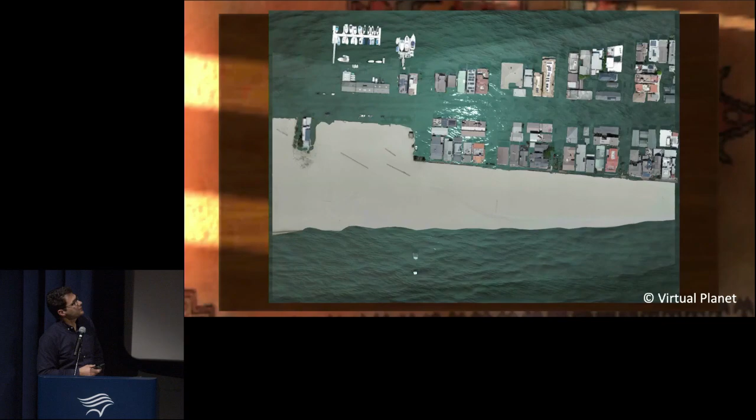There's a little delay with the clicker, sorry. So I'm going to play that again. And also, while that's playing, I'd like to acknowledge Paulo and Gian are in the back. They're part of our team. They're really the ones that make all this magic work. They came a long way to be here. I'm happy they could make it. If you have technical questions about virtual reality, these guys are the best that are out there.

Then we showed the VR to some of the folks as well, and very interesting conversations came out of it. Someone said, oh, can you show my house flooding? I was like, well, we're not ready yet, but why do you want to see that? So people get really curious about what can be done. So long-term, short-term, and here's some of the reactions. Wow, what would it look like?

So one of the great things I think about VR is: what would a 10-feet seawall look like? What would the dunes look like? If you put like 20-feet dunes on the ocean side, by the way, you also need them on the bayside. I don't know how you surround everyone with sand dunes, but we could show you what that looks like. We could put you in the headset, you'd be standing on the dune or at your house and see what that would do. So this is a very powerful communication tool.